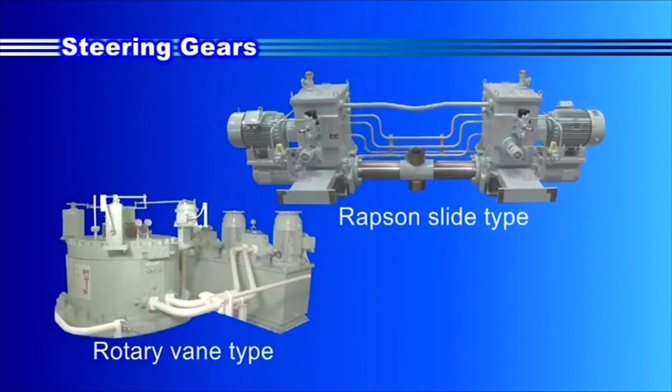Large steering gears come in rotary vane and Rapson slide types. The rotary vane type operates as follows.

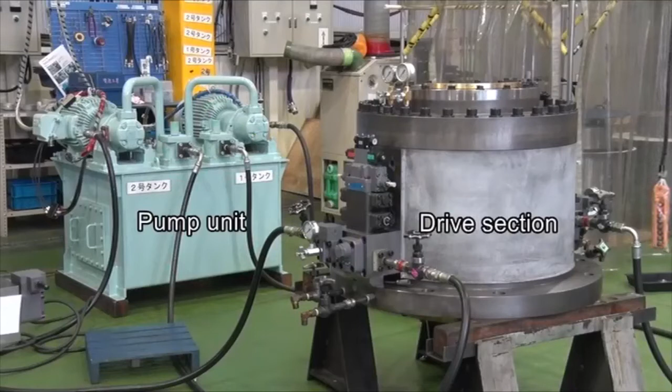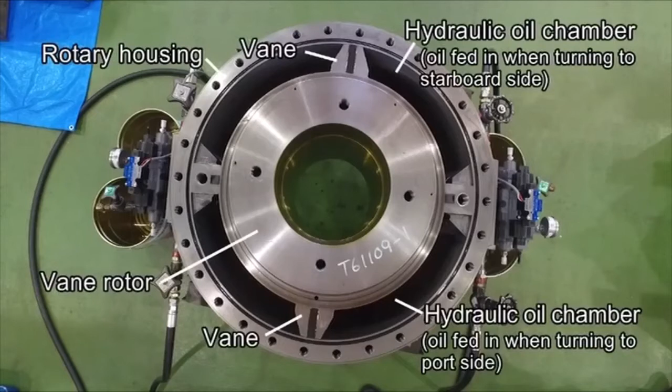Hydraulic pressure from the vane pump installed on the pump unit is conveyed via a control valve to the rotary housing. The rotary housing interior is divided into the port side and starboard side hydraulic oil chambers. For example, when turning to the port side, oil is fed into the port side hydraulic oil chamber.

Here is a list of parts and seals for the actuator bottom.

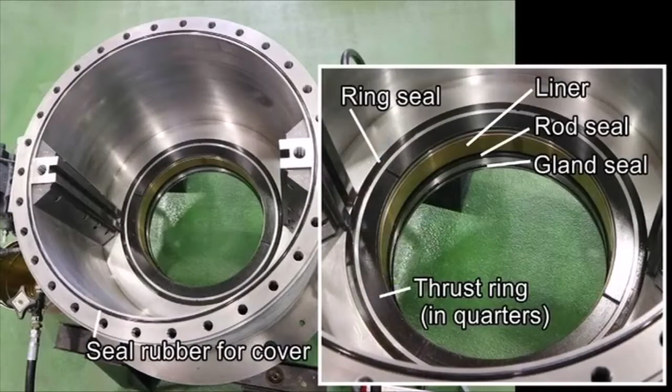Let's look at parts and the structure of the rotary vane type steering gear as we assemble it. First, insert the rotor.

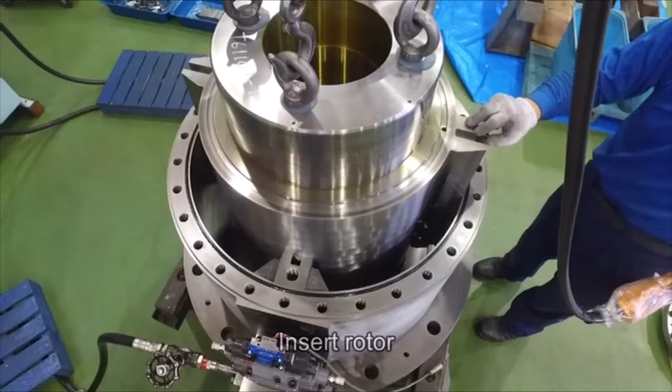Insert vertical seals for vanes.

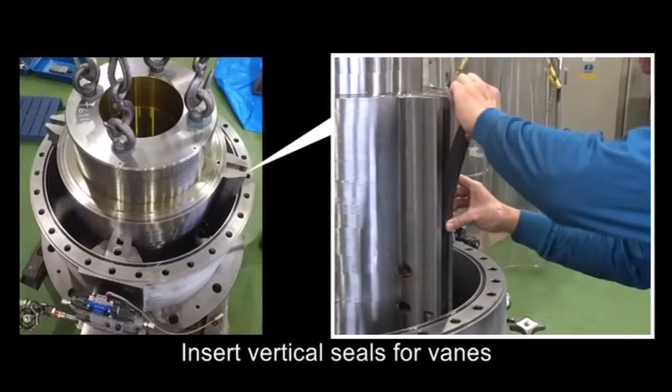Insert seals for segments.

Insert cover sealing rubber.

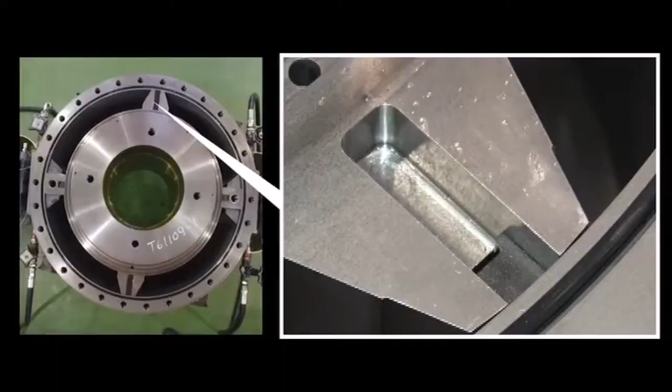Insert plate springs into vertical seals for vanes.

Insert horizontal seals for vanes.

Insert plate springs into vertical seals for segments.

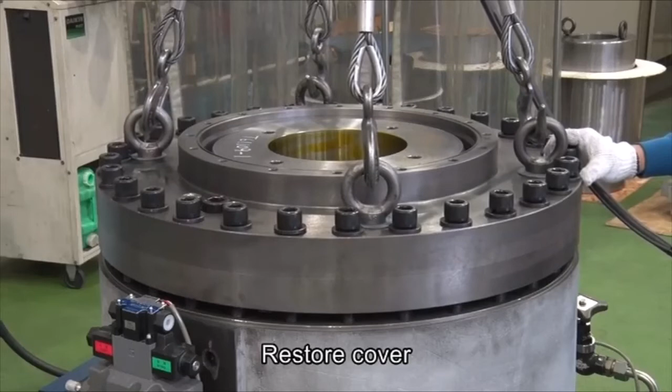Insert the rod seal.

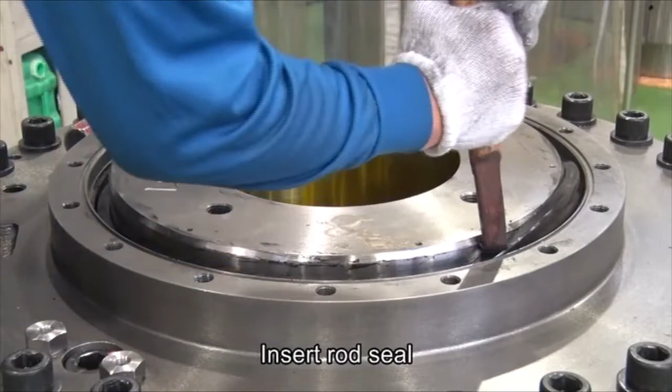Insert sealing rubber for the gland.

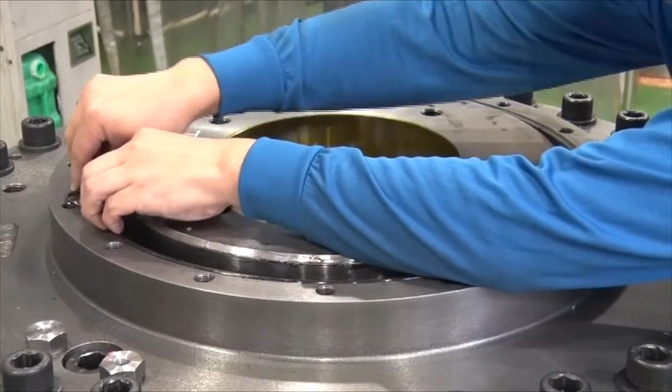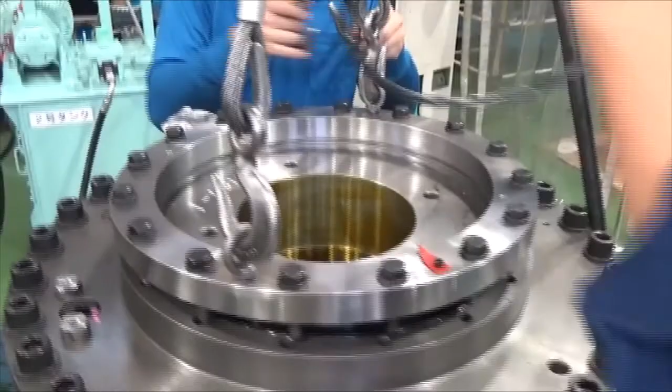Put the gland seal in place.

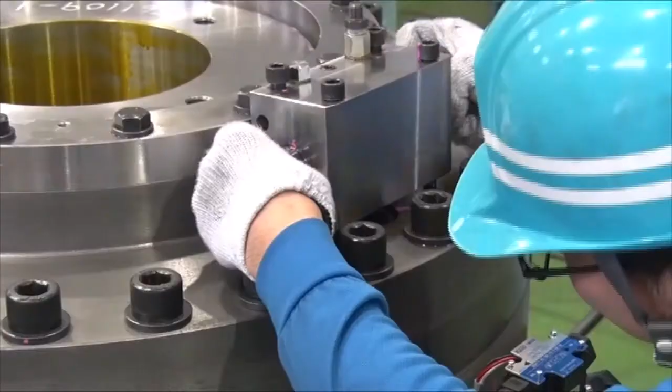Attach the rudder angle indicator.

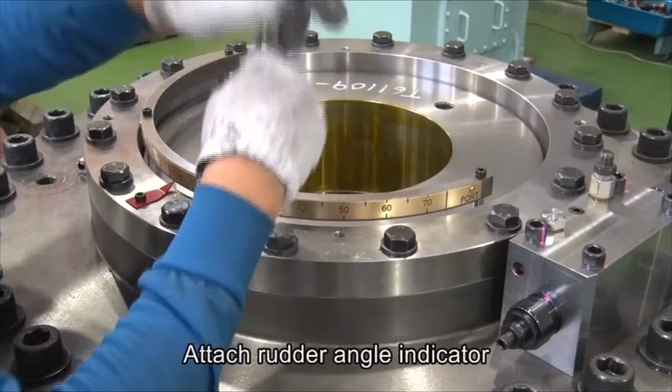Connect the pump unit to the steering gear. Bleed the steering gear of air before starting operation.

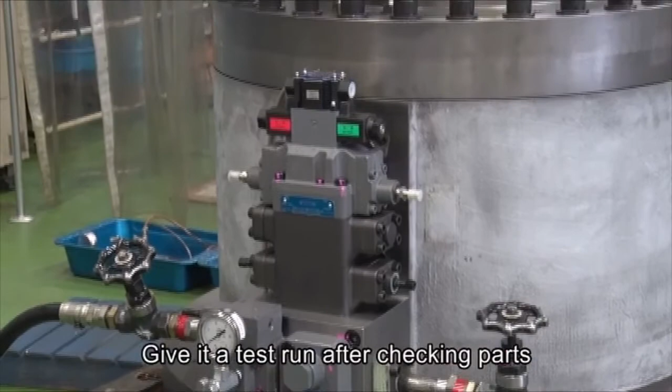Give it a test run. Confirm turning of the rotor with the rudder angle indicator.

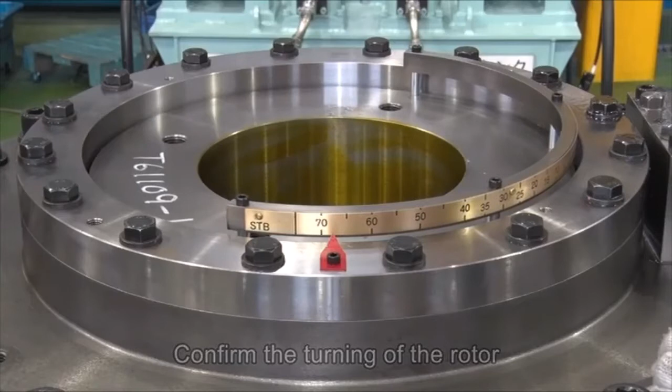The following are typical cases of trouble with rotary vane type steering gears: hydraulic oil leakage from the gland seal, hydraulic oil leakage from the lower seal, and wear of leakage oil seals.

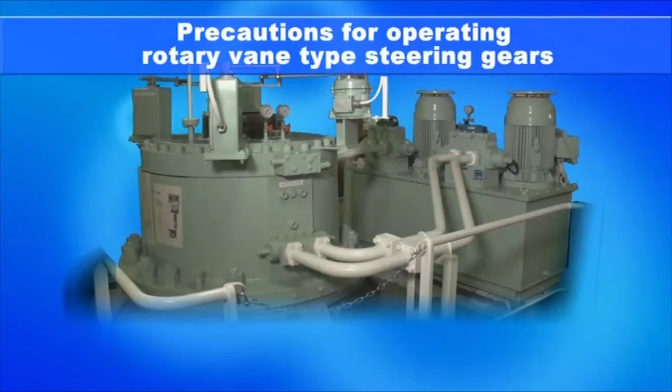The following precautions must be taken when operating rotary vane type steering gears. Check abnormal sounds, vibrations, overheating, oil temperatures, and leakage. Changes in the oil amount. The motor's current values and fluctuations. The hydraulic pump's discharge pressures and fluctuations.

Regular inspections of system oil properties. Regular inspections of the return filter. And confirmation of grease supply conditions for the gland seal.

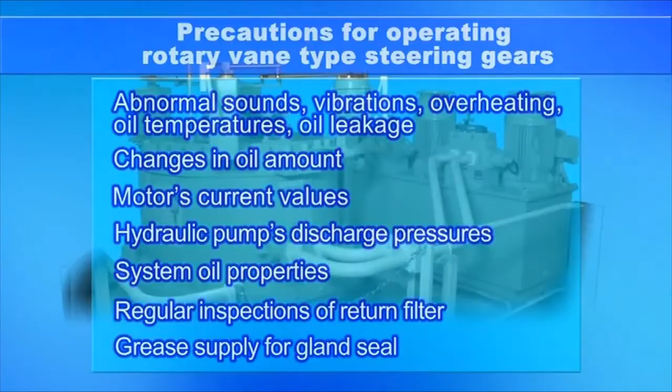Rapson slide-type steering gear drives the cylinder ram with hydraulic pressures from pump units. It moves the ram to the right and left by synchronizing hydraulic pressures from the pair of right and left pump units.

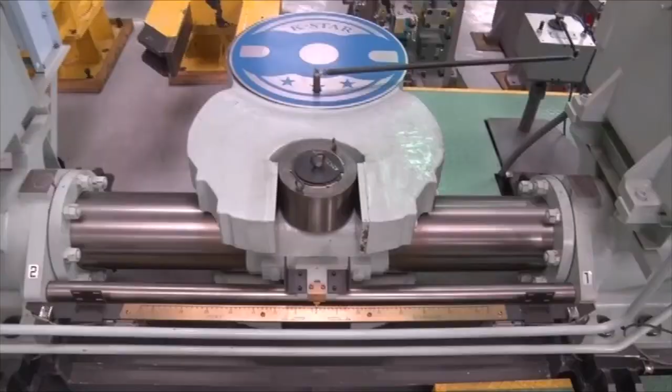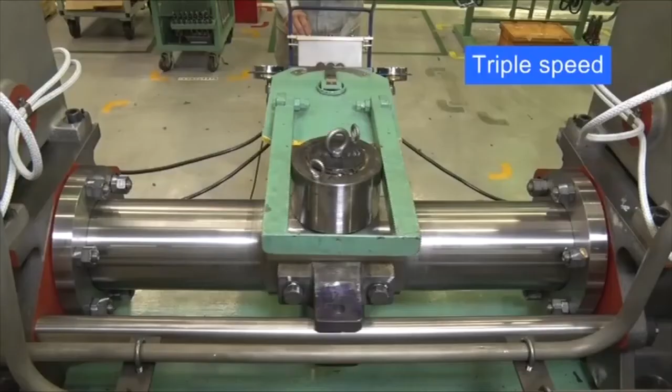Since a tiller, which uses the steering shaft as its rotation axis, is in contact with the ram pin, the steering shaft rotates as the ram moves right and left. Here, we have reproduced the ram movement using a test machine.

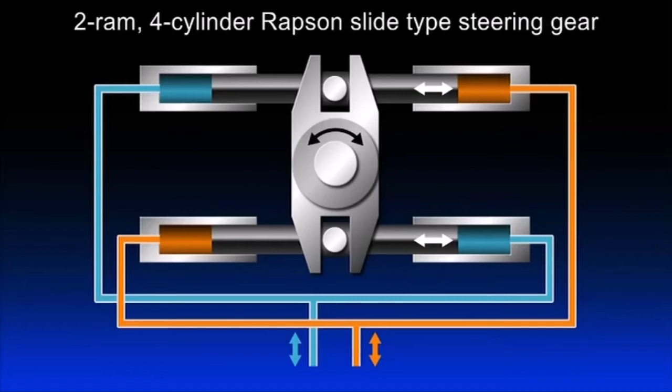This is a schematic diagram of a 2-ram, 4-cylinder Rapson slide-type steering gear. You can see pressure oil being sent from the hydraulic pump in the pump unit.

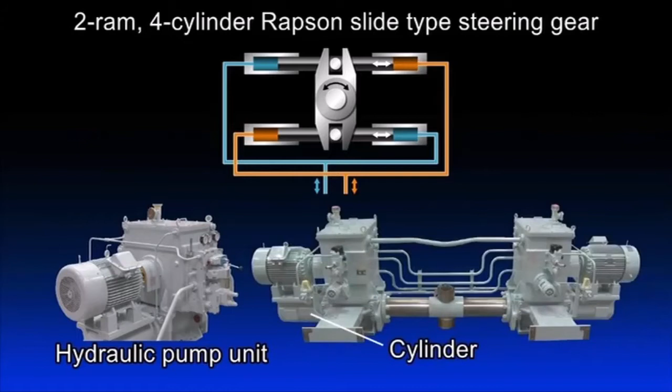The torque motor is controlled by steering angle deviation signals given by the steering stand. It delivers pressure oil to specified hydraulic cylinders, thereby moving the ram and rotating the steering shaft.

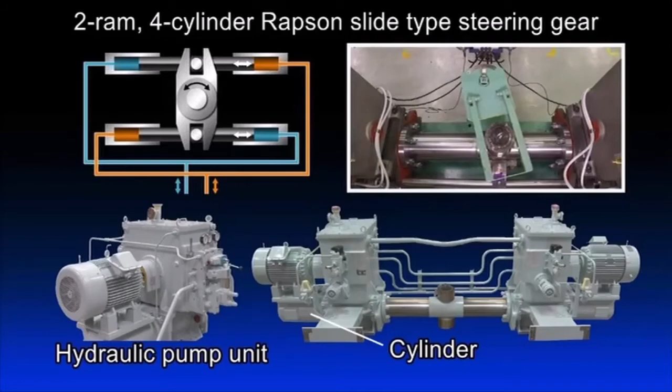The Rapson slide type comes in the following models.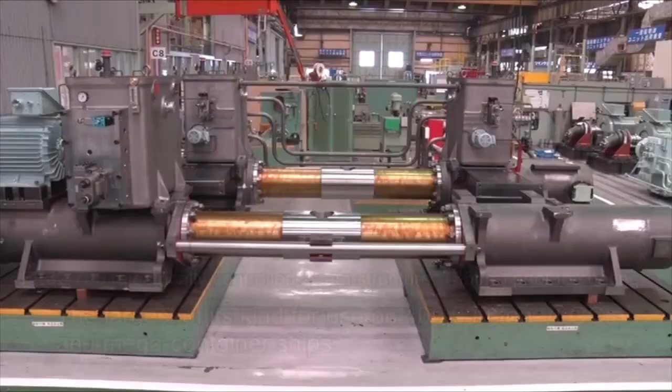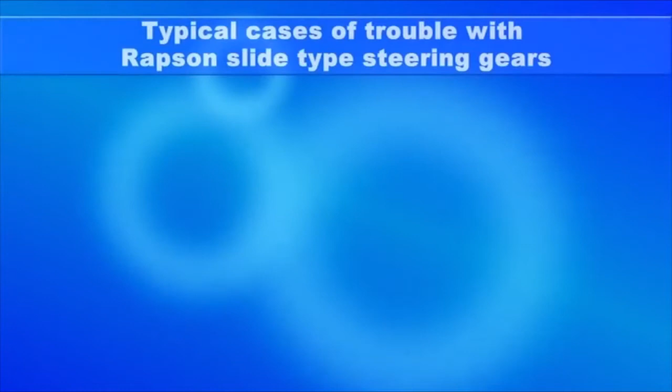The following cases of trouble have been reported: switching failure of solenoid valves in the hydraulic circuit, oil leakage from the ram's gland packing, and coming off of the ram pin.

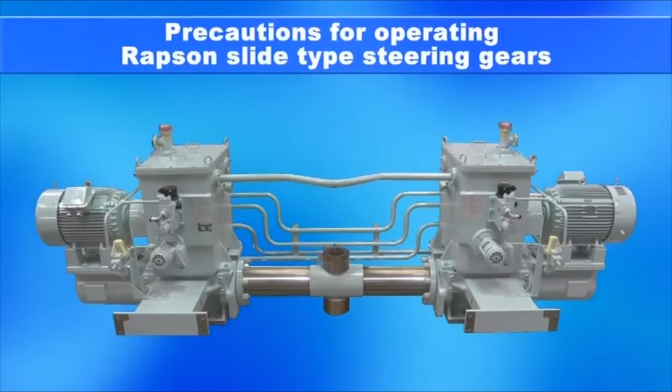The following precautions must be taken when operating Rapson slide-type steering gears. Check abnormal sounds, vibrations, overheating, oil temperatures, and leakage. The oil amount and changes. The motor's current values and fluctuations. The hydraulic pump's discharge pressures and fluctuations.

Regular inspections of system oil properties, and regular cleaning of the suction strainer.

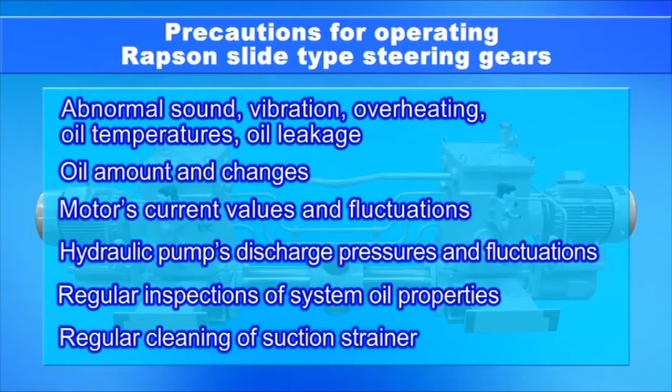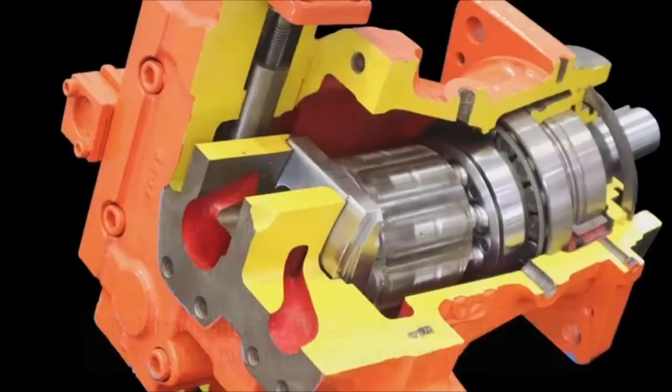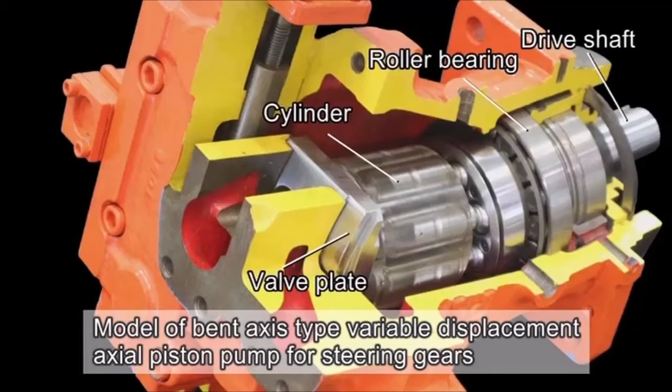Hydraulic pumps and motors are vital components used to drive steering gears and mooring equipment. Screen shows the model of the bent axis type variable displacement axial piston pump for steering gears and consists of the following parts: the drive shaft, cylinder, roller bearing, valve plate, oil seal, and so forth.

The cylinder block rotates as the drive shaft turns. When the rotating cylinder block is inclined toward the drive shaft core, the piston makes a reciprocal motion inside the cylinder per rotation of the cylinder block, thereby drawing in and discharging oil.

This pump is of a variable displacement type and is able to change the cylinder's tilt angles. When used with steering gears, it is incorporated in the oil tank.

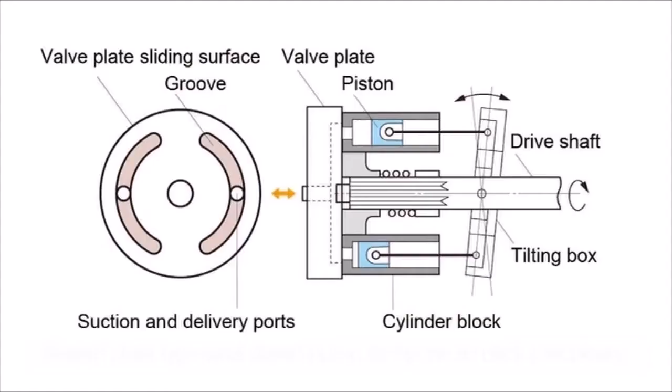The swash plate type axial piston pump for hydraulic deck machinery consists of the following main parts: the drive shaft, cylinder block, piston, tilting box, swash plate shaft, and valve plate.

Used as hydraulic pumps for deck machinery, this type of pump has a piston whose direction of motion is in parallel with the cylinder block's rotation shaft core. As the tilting box tilts, each piston makes a reciprocal motion within the cylinder each time the cylinder block makes a rotation, thereby drawing in and expelling the liquid.

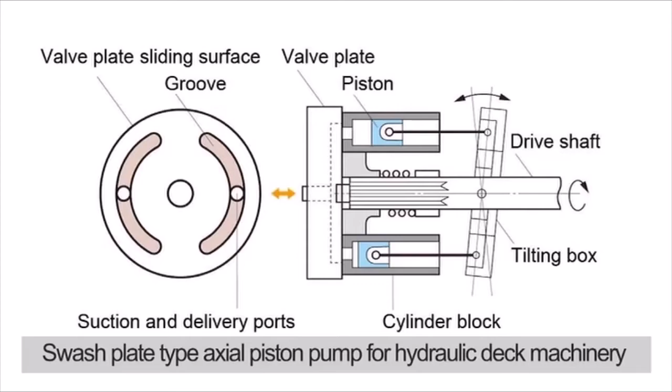The following cases of trouble have been reported: wear of the valve plate sliding surface, and oil leakage due to damaged oil seal.

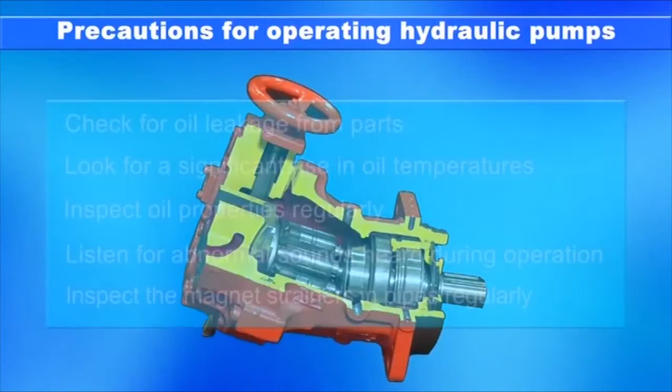The following precautions must be taken when operating hydraulic pumps. Check for oil leakage from parts. Look for a significant rise in oil temperatures. Inspect oil properties regularly. Listen for abnormal sounds heard during operation. And inspect the magnet strainers in pipes regularly.

The hydraulic motor for deck machinery use has a part structure as follows. The casing has cylinders in the radial direction, and the flange part is provided to secure oil passages to the cylinders and to fix the motor.

The valve housing is fixed with bolts across a spacer in which a valve spool rotates. The crankshaft is supported by two taper roller bearings, the other end of it being connected to the output shaft.

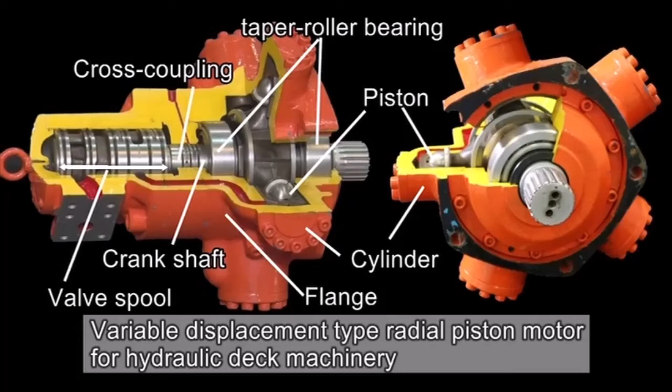With this hydraulic motor, A and B ports are provided to serve as the inlet for high-pressure hydraulic oil or the tank-connected outlet for the oil. The motor's rotational direction is determined by which port the hydraulic oil is sent.

When hydraulic oil is sent to A port, hydraulic pressure is applied to the upper part of the piston and generates a force to push down the piston, allowing the crankshaft to rotate.

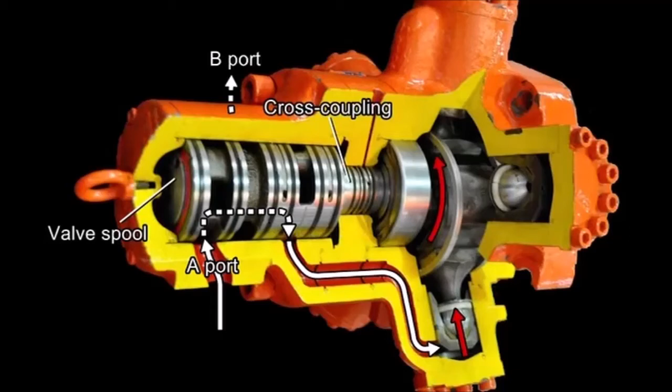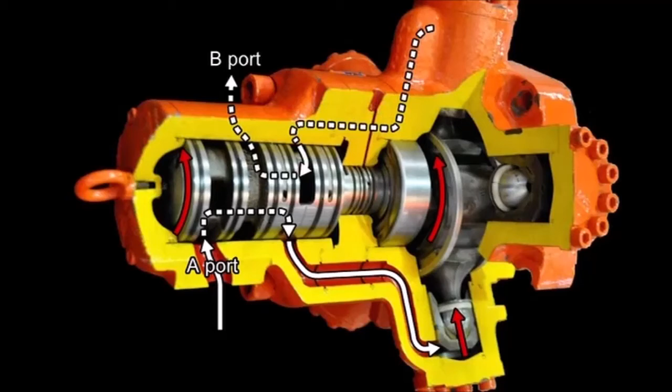The valve spool, which is connected to the cross coupling, rotates accordingly. Then, the oil feeding port positions change, allowing the hydraulic pressure to be applied to the next cylinder in the rotational direction. Port positions for discharge change likewise. Repetition of these motions keeps the crankshaft rotating.

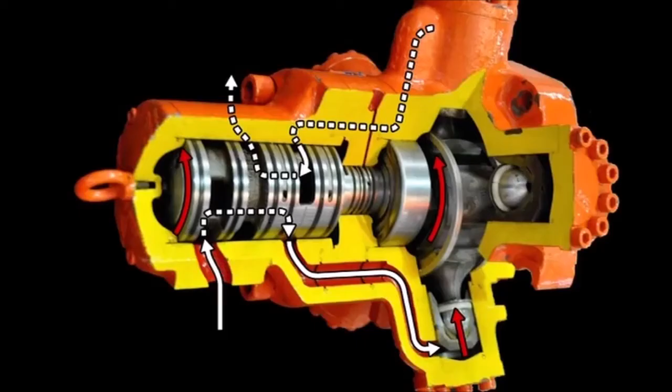The following cases of trouble have been reported: cracking of the cylinder block, oil leakage and damage to the oil seal, and foreign matter contaminating the hydraulic oil.

The following precautions must be taken when operating hydraulic motors. Conduct regular inspections of oil properties. Watch out for oil leakage. Make sure to conduct complete flushing after repairs. And operate the motor very carefully in cases where the handle must be abruptly manipulated or the operator can lose control due to stormy weather or other unexpected external factors.

To properly operate and manage onboard auxiliary machinery, it is essential that you fully understand and grasp machine structures by reading maker-provided instruction manuals and referring to trouble case studies. You are also advised to prepare for maintenance plans well in advance by making inquiries with the manufacturer if specific operational conditions lead you to suspect trouble may occur.